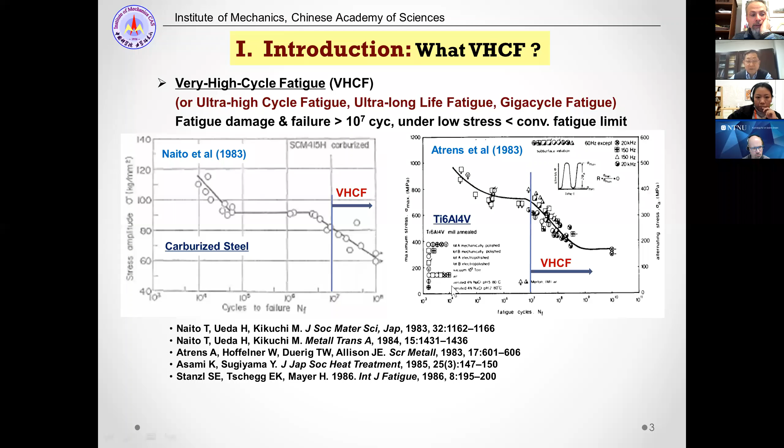We can see this part beyond 10 to 7 cycles of loading, and also here beyond 10 to 7 cycles of loading, the very high cycle fatigue regime.

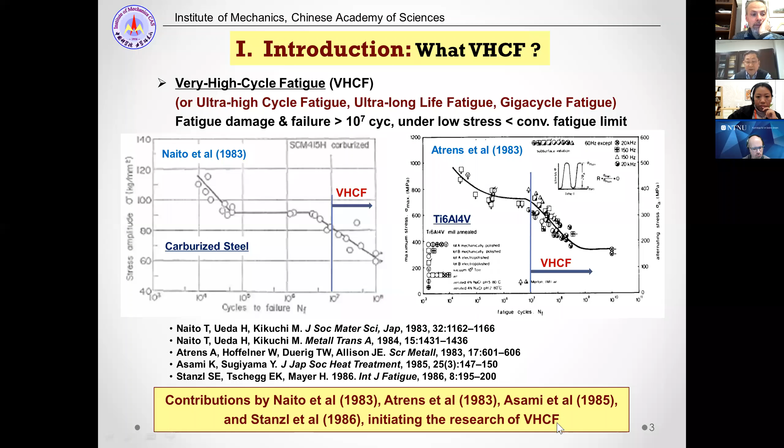I would like to say, due to the contributions by some early researchers, they initiated the research of very high cycle fatigue in the 1980s.

Here I would like to mention the reasons of very high cycle fatigue research. I would like to say very high cycle fatigue is a cutting edge regime in fatigue research, and also

a new regime, because very high cycle fatigue research is only 40 years old or less than 40 years old.

And the total fatigue research history is about 170 years. And very high cycle fatigue is

an important area of research because very high cycle fatigue behavior mechanisms are different from the cases of high cycle and low cycle fatigue.

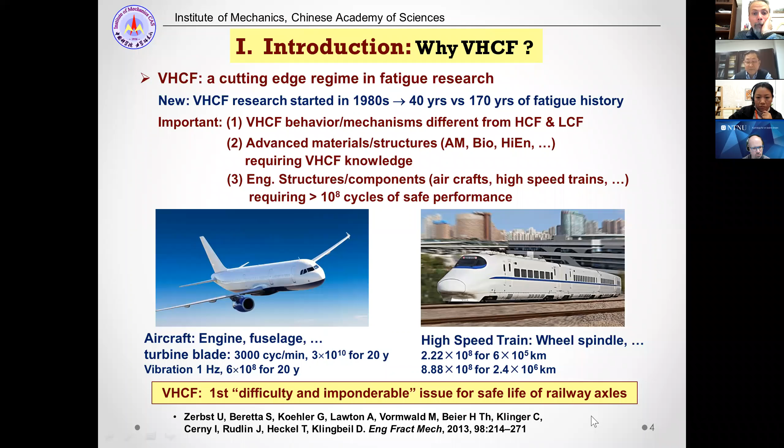So today I would like to share with you the challenges in very high cycle fatigue and the numerous cyclic pressing model we proposed.

So after such major content of the talk, I would like to share with you this type of topic. In these contents, I will use high strength steels and titanium alloys as examples.

Now the second part, basic characteristics of very high cycle fatigue, with four points in this part: first, internal crack initiation; second, SN curve; third, crack initiation life; and fourth, crack extension rate in initiation.

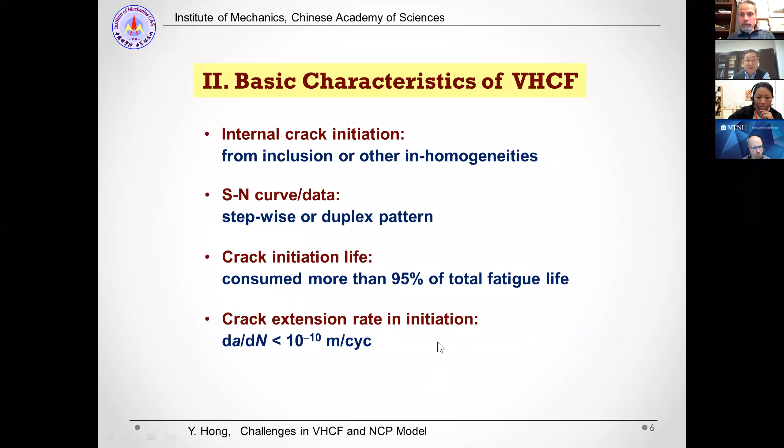The first point, internal crack initiation. We all know that fatigue crack initiation in low cycle and high cycle fatigue is due to persistent slip bands.

But in very high cycle fatigue, the crack initiation and growth mechanism is different.

The fisheye feature contains a rough area called FGA, fine granular area.

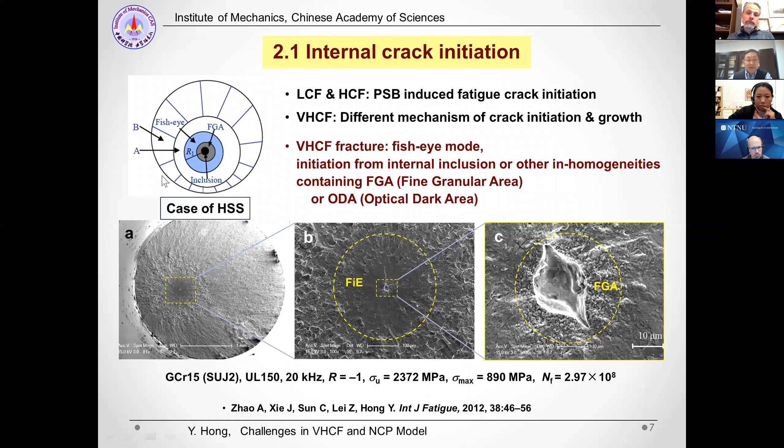We then tried to measure the size of FGA, this crack initiation region, and the value is between 40 and 100 microns, as the data shows here.

We also tried to calculate the data; this value for this region is related to the stress and the size of the defects.

And the value for delta K FGA is between 4 and 6 megapascal root meter, as the data shows here.

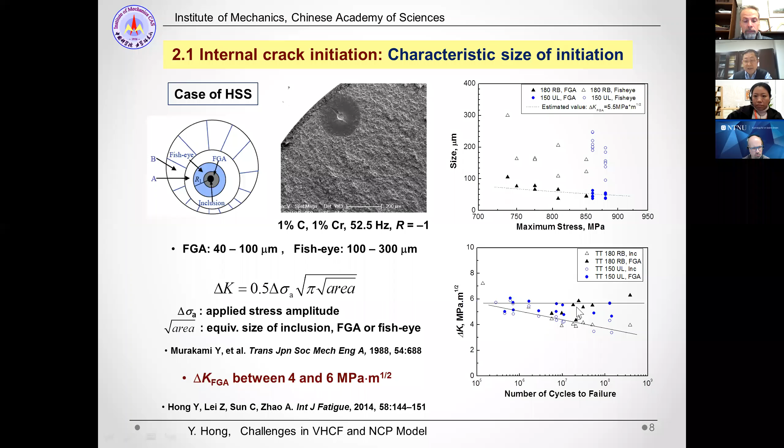So we proposed that the size of FGA, this initiation region during very high cycle fatigue, is an intrinsic characteristic size for internal crack initiation.

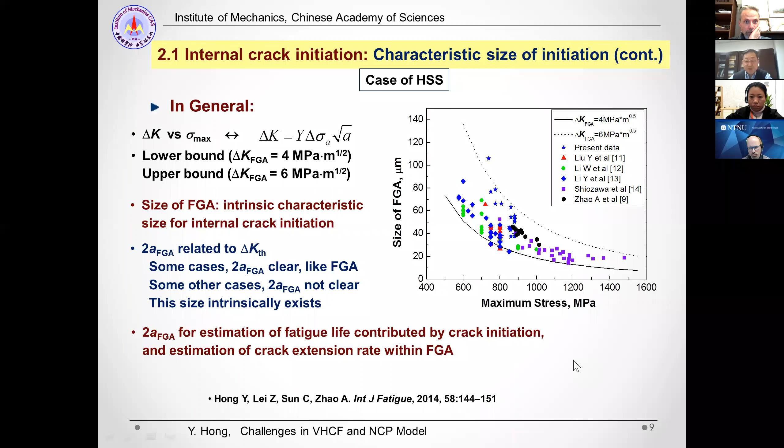Now I would like to talk about the case of titanium alloy. The crack initiation is also a fisheye feature, but for titanium alloy, the initiation spot is not an inclusion, but

some facets in the initiation area due to the cleavage process of the titanium alloy,

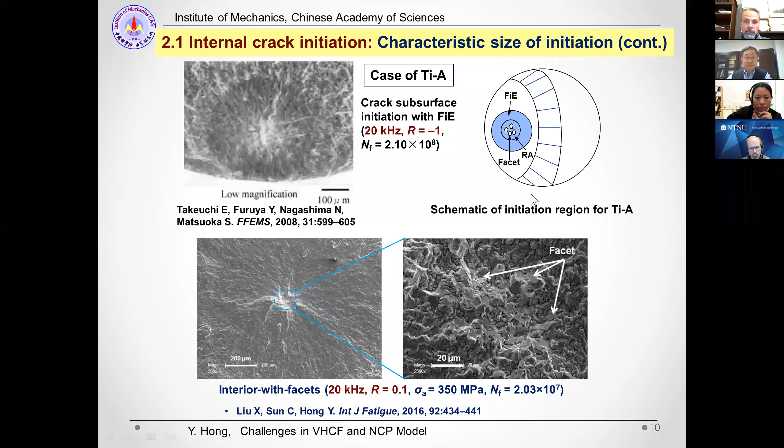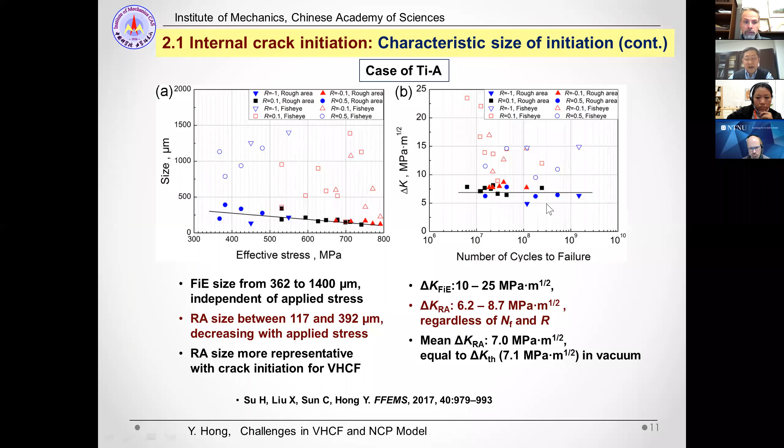We also measure the RA size, and it's between about 120 and 390 microns, which is also quite stable in comparison with the fisheye size. There is a large range for fisheye size, and also the delta K RA value is stable for titanium alloys.

So we try to analyze the threshold value for the crack initiation region. We use the formula for plastic size at the crack tip, and also a formula to correlate microstructure characteristic size in relation to material parameters of shear modulus and yield stress. We assumed when the plastic size of the crack equals the characteristic size of the material, the FGA formation is completed.

Thus we can obtain this result to show delta K FGA. This value is just in relation to shear modulus and Burgers vector of the material. It's very interesting and important, showing that delta K FGA or delta K TH is a function of Burgers vector and shear modulus of material. For steel, this value can be calculated as about 5.5 megapascal root meter, and this is in agreement with experiment.

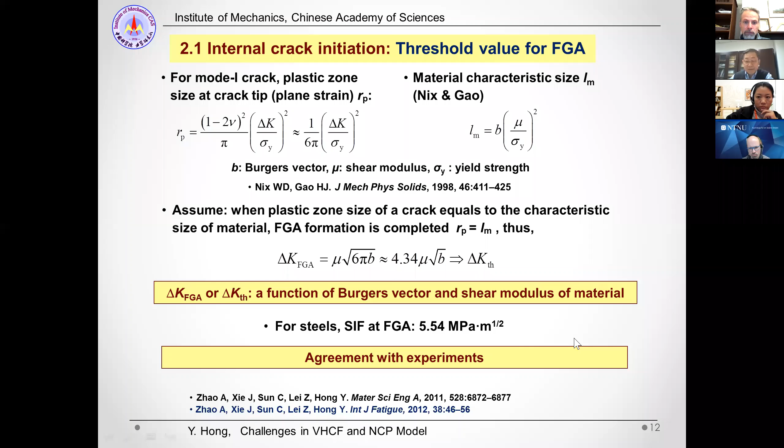That's the first point, and then I will mention the second point, the SN curve.

These are the data from a kind of round-robin test organized by Professor Sakai. The left part is crack initiation from surface cracks causing fatigue failure, and the right part is from internal crack initiation. We can see it's a kind of duplex SN curve, or stepwise SN curve, for high strength steel. For titanium alloy it's also a stepwise SN curve trend, also due to surface crack initiation and subsurface or internal crack initiation. So due to the different type of crack initiation from surface or from interior, they result in different trends of SN curve. That's the second point.

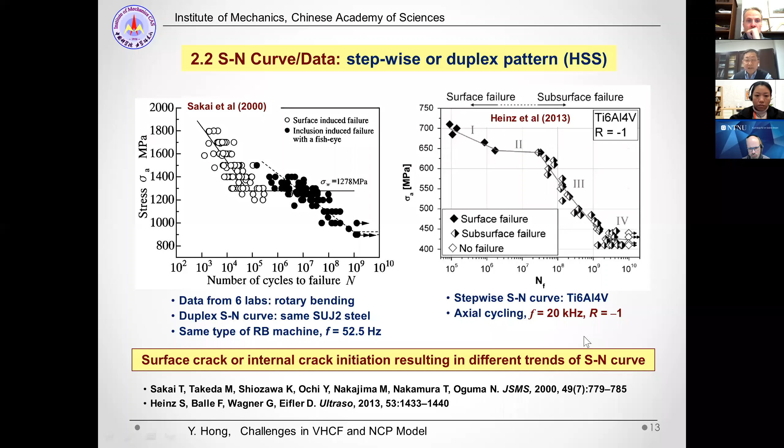The third point is about crack initiation life. We have mentioned previously the delta K value, which is a threshold for crack initiation.

We also assume the Paris relation can be used to describe the crack growth after the initiation, that is after delta K FGA. Then we can use the Paris relation to calculate the fatigue life from the boundary of FGA to the fisheye, and then from the fisheye to the critical size. From the boundary of FGA to the boundary of fisheye, that's N sub 1, and from the boundary of fisheye to the final fracture point, that's N sub 2.

For example, N sub 1 can be written like this, and we also use such parameters for calculation. After this, we can obtain the initiation life by the total fatigue life minus N sub 1 and N sub 2.

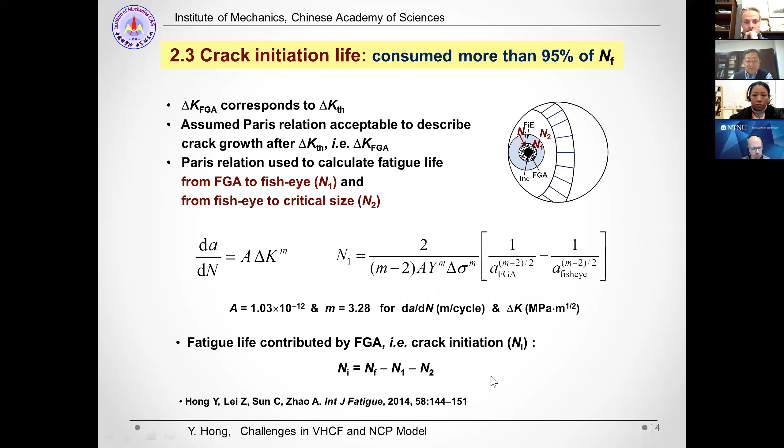Therefore we are able to obtain the result for high strength steel. This result shows that at very high cycle fatigue regime, the initiation life is larger than 95% of total fatigue life. And if the fatigue life is 50 million cycles, the initiation life is larger than 99% of total fatigue life.

For titanium alloy, the initiation life for very high cycle fatigue is between 96 and 99%. So we can say that for fatigue damage, including very high cycle fatigue, the fatigue life is almost consumed by the crack initiation process, that is the formation of the initiation zone of FGA, or RA.

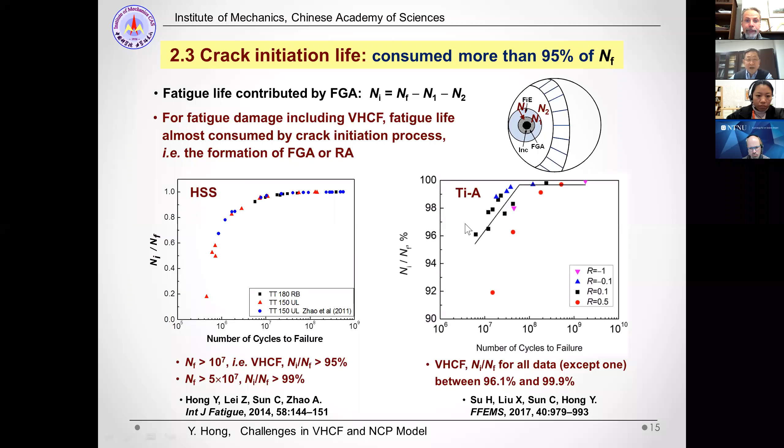The fourth point is about crack extension rate in initiation. We have been talking about the initiation life, and also we know the size of this initiation zone, so we can obtain an average value for crack initiation extension rate. I like to use the term extension instead of growth, for the extension rate within FGA or RA, for high strength steel and for titanium alloy.

The value for high strength steel is 10 to minus 12 and 10 to minus 13 meter per cycle, and for titanium alloy is 10 to minus 11 and 10 to minus 13 meter per cycle. It's very slow. I would like to mention some indirect measurements of these extension rates.

I think this is the first case, by Stanzl-Tschegg and her co-author, showing that the extension rate in FGA is 10 to minus 12 meter per cycle. They used this type of specimen to perform the measurement, and compared the fracture surface morphology with the tubular specimen and the round specimen to get this value.

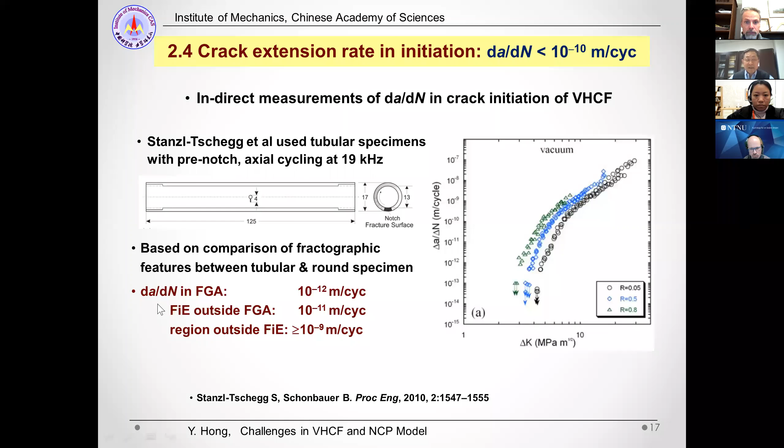Another indirect measurement uses a kind of repeated two-step testing, and they are able to catch the pitch mark on the fracture surface, but their measurement is the area of the fisheye region beyond FGA, the initiation area.

Another example of indirect measurement uses variable amplitude testing for structural steel, and this result for a high carbon bearing steel gives 10 to minus 11 and 10 to minus 12 meter per cycle for the fisheye.

Such efforts are devoted to the crack extension rate in the fisheye region outside FGA. So we are expecting direct measurements of crack extension in the real initiation region of FGA, or RA.

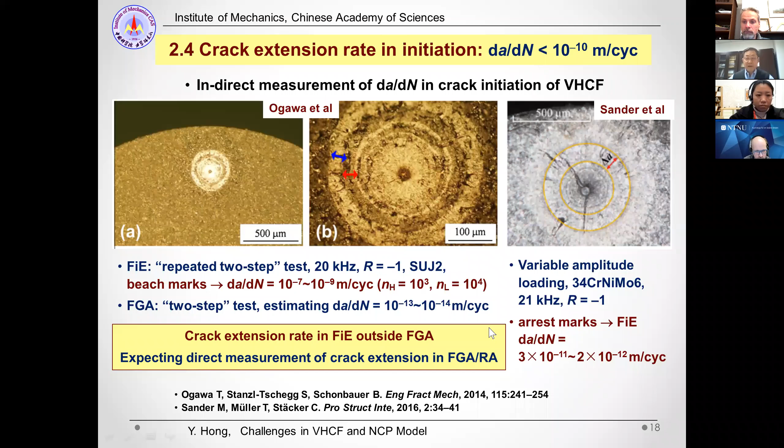This is the first case of crack extension rates obtained in high strength steel, and we use a kind of repeated two-step cycling to catch the crack growth traces in the FGA stage or FGA region, and then we are able to obtain the crack extension rate in this region directly.

The result shows the rate is between 10 to minus 11 and 10 to minus 13 meter per cycle. We are happy to see that the result here can be well connected with the growth data in the FGA, in the fisheye region outside FGA, meaning that the initiation extension rates and the early growth stage crack rates, from the beginning to the early growth, are well connected.

This we are happy to see is the data trend.

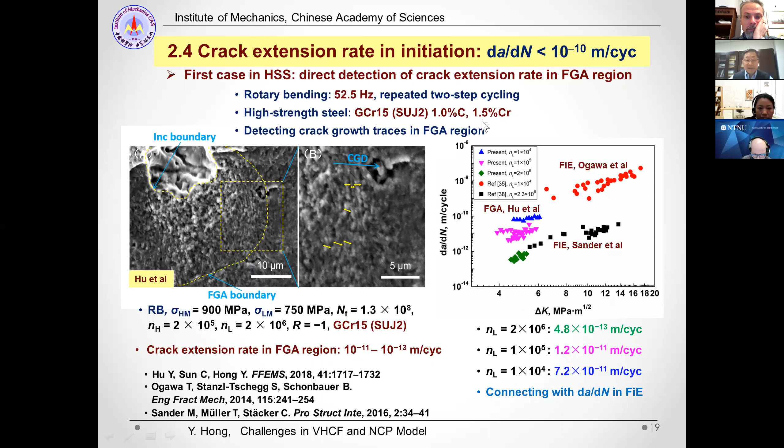This is a step cycling for a stainless steel, and the results show that the data is between 10 to minus 12 and 10 to minus 11 meter per cycle.

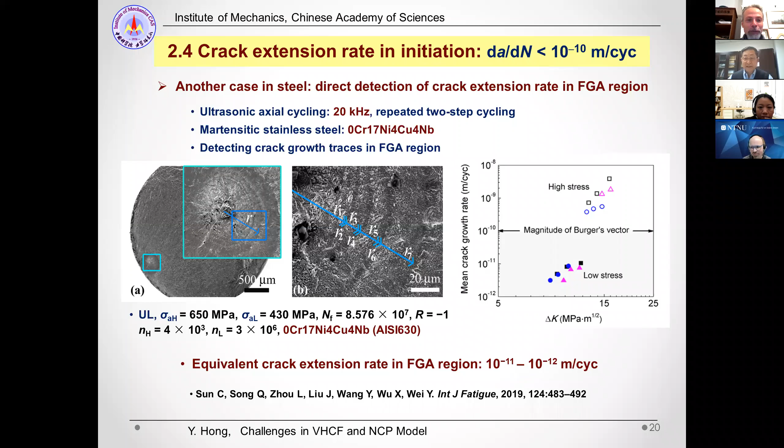I think the internet is okay now, right, Luca? Can you hear me? To be honest, sometimes it doesn't work, but I think we can follow, so please keep going. In case I would stop. The connection is a little slow, but I think we can follow what you are saying. Maybe since we are focused on your slides, you could turn off your camera, it might help. You have a button at the bottom of the screen on the left hand side. If you stop your video and keep talking, we can follow your presentation by watching the slides. It seems that now it's working, so please keep going. In case I would stop you. Thank you for double checking.

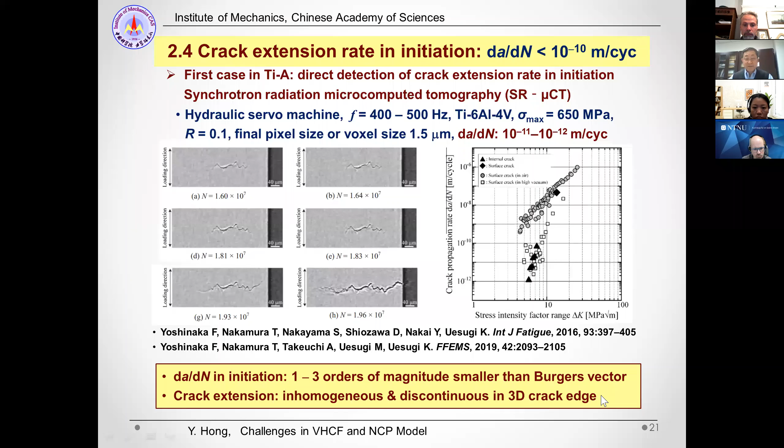Now the summary of this part: I would like to show this picture of crack initiation and early growth for high strength steel and titanium alloy. The initiation region of FGA is a characteristic region for crack initiation, and the value of delta K, the delta KFGA or delta KRA, is almost constant and is a function of Burgers vector and shear modulus. More than 95% of total fatigue life is consumed in the initiation region.

Also, the crack extension rate is very low, between 10 to minus 11 and 10 to minus 13 meter per cycle. So in this stage, we say very high cycle fatigue is a cutting edge research regime, and it contains unique characteristics and mechanisms. So we would ask, what are the challenges in very high cycle fatigue?

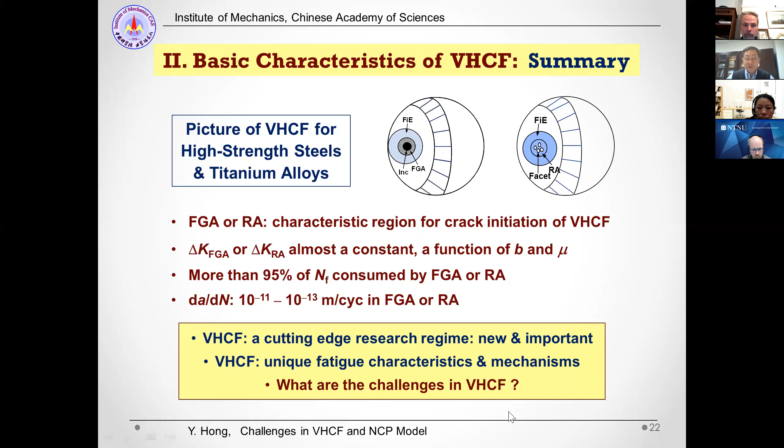The next part is major challenges in very high cycle fatigue. I would like to mention 3 points: the first is loading frequency effect, the second is cracking evolution detection in the initiation phase, and the third is parameters and models to characterize crack initiation and predict fatigue life.

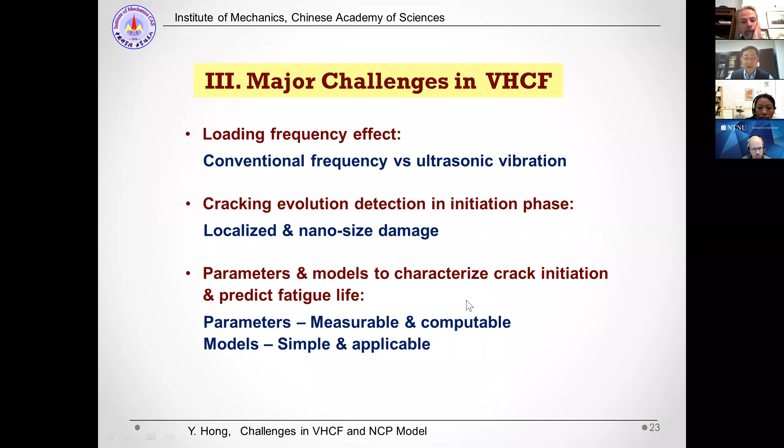About loading frequency effect, I will show you this example. For the high strength steel material, the frequency effect is limited.

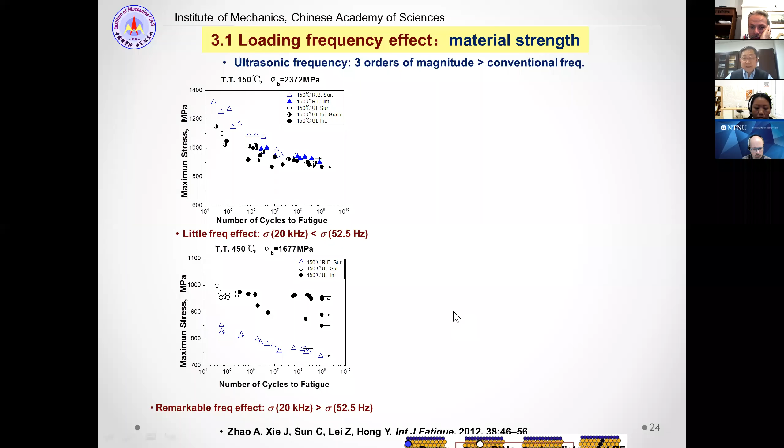But for the low strength state of the material, the frequency effect is very large, and as a result, the fatigue strength by ultrasonic frequency—that's very high frequency—is larger than the conventional frequency. This is explained because for high strength states, the microstructure is refined and contains large amounts of barriers that restrict dislocation movement. But for low strength state material, the barriers are fewer, so there's limited restriction for dislocation movement.

So the dislocation moving distance will be inversely proportional to the loading frequency. For low strength state material, the damage per cycle will be larger than the damage per cycle of ultrasonic loading. So we say that for low strength material, the frequency effect is remarkable, but for high strength material, the frequency effect will be diminishing.

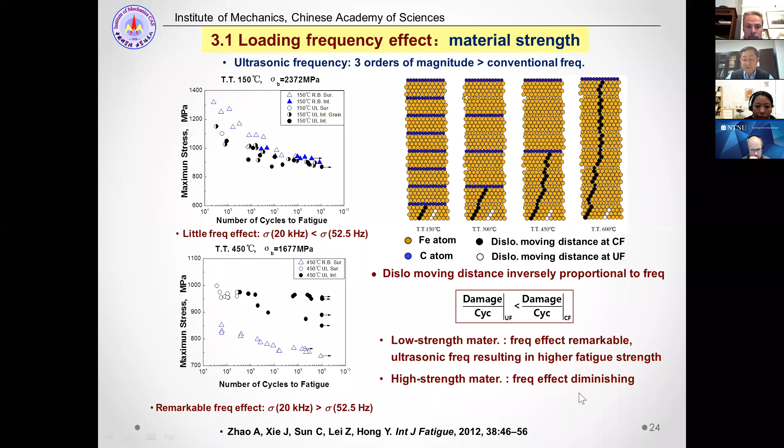I also would like to mention the temperature rise under different loading frequencies—that's a loading frequency effect. We have this type of result to show: for the specimen without cooling under ultrasonic frequency loading, the temperature rise is about 70 to 130 degrees.

But if the specimen is subjected to air cooling, the temperature rise is somehow smaller. For the case of very high cycle fatigue testing, the temperature rise is less than 25 degrees. For loading frequency of 120 hertz, which is not conventional frequency, the temperature rise is very limited, less than 3 degrees. So we can say high frequency, especially ultrasonic frequency, will cause specimen temperature rise, and if this happens, it will reduce the material strength and also change the frequency response, reducing fatigue strength.

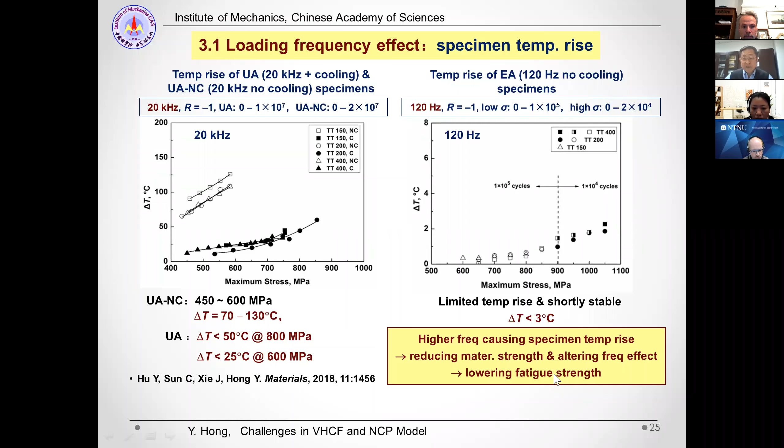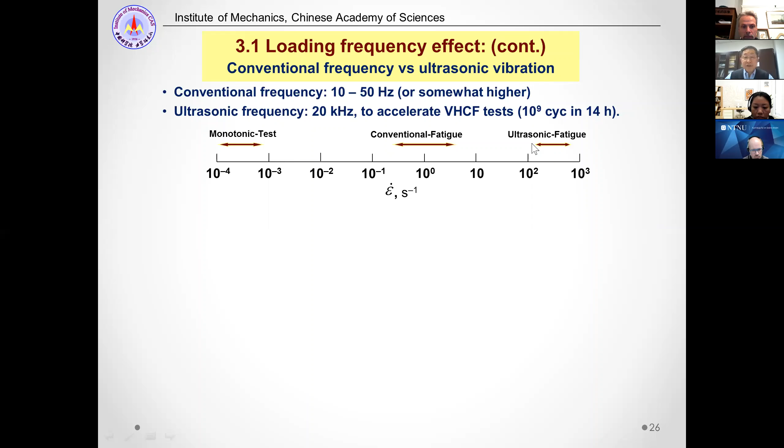So for the frequency effect, there's about three orders of strain rate difference between conventional fatigue and ultrasonic fatigue. As I mentioned, for low strength state the frequency effect is remarkable, but for high strength state the frequency effect is limited. Also, high frequency causes specimen temperature rise. Also, for BCC and HCP materials the frequency effect will be sensitive, while for FCC material the frequency effect will be less sensitive. But this topic I think is also a challenge for very high cycle fatigue research.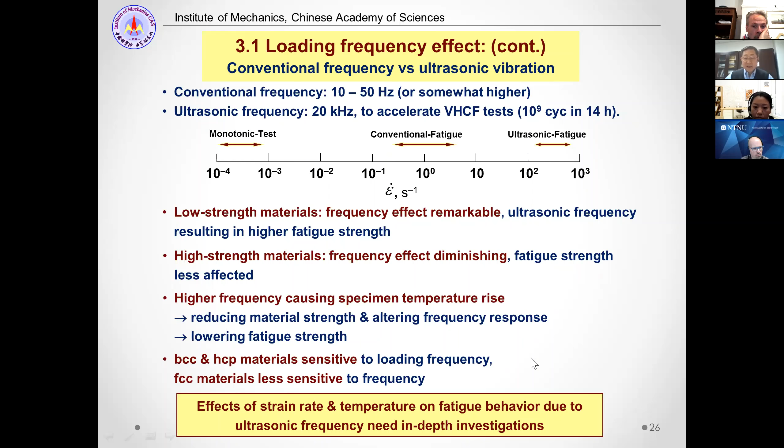It needs in-depth investigation. The second challenge is crack evolution detection in the initiation phase, and this is a promising method—synchrotron radiation microcomputed tomography. This is from Nakamura's group. They use this new method to observe the defect of crack initiation and early growth, and also measure the crack growth or extension rates between 10 to the -11 and 10 to the -13 meters per cycle.

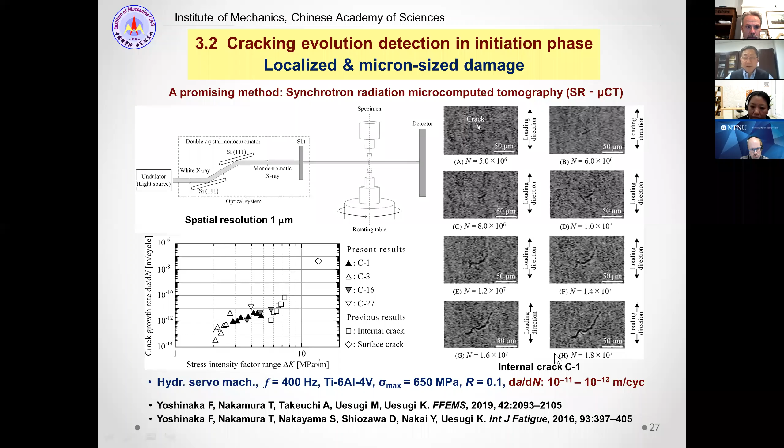Another example is by Professor Palin-Luc's group, using a kind of in-situ synchrotron ultrasonic testing. The difference between this one and the previous one is they use ultrasonic testing to accelerate the fatigue process, but the previous one used a frequency of 400 hertz. So it's a different kind of testing. They use a similar method to detect the small damage evolution process, but I think it's also still in the beginning stage.

In this case, they're very clever to use a kind of artificial defect inside the specimen to detect or observe the defect evolution or defect development during the loading process. And if we can explicitly reveal the crack initiation and early growth, this will lead to a significant breakthrough of very high cycle fatigue research.

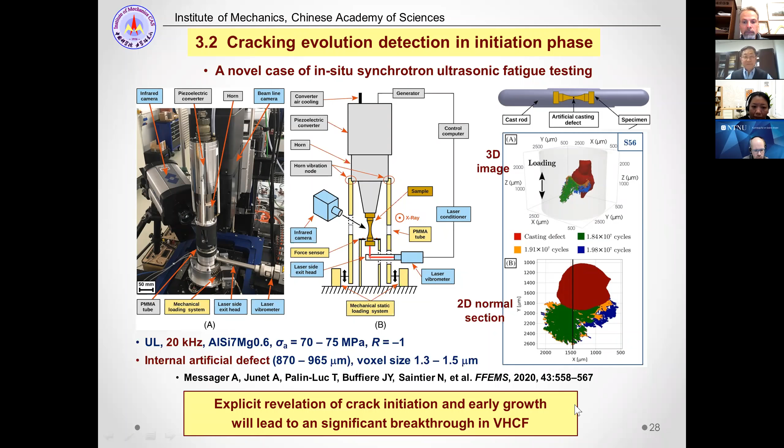The third challenge is parameters and models to characterize crack initiation and predict fatigue life. Here I would like to mention the model by Murakami—this is very often used, and also the concept and parameter of root area is often used in very high cycle fatigue assessment. This model correlates fatigue strength in relation to the material hardness parameter and also the defect size.

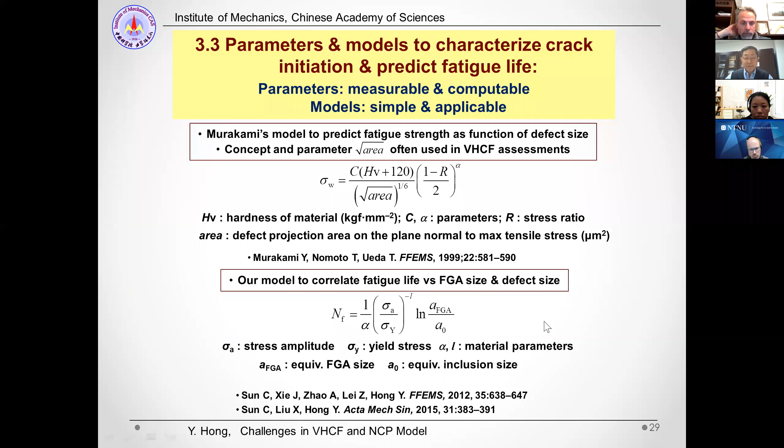In recent years, we also proposed a model to correlate fatigue life to the loading stress and yield stress and FGA size and inclusion size. Also, I would like to mention the concept of fatigue indicator parameters. This is to be used in very high cycle fatigue, and previously quite often used in low cycle and high cycle fatigue regimes. This topic was covered in the first Global Live webinar by Professor McDowell—I think we can refer this aspect to his talk, his presentation, which is available on the website.

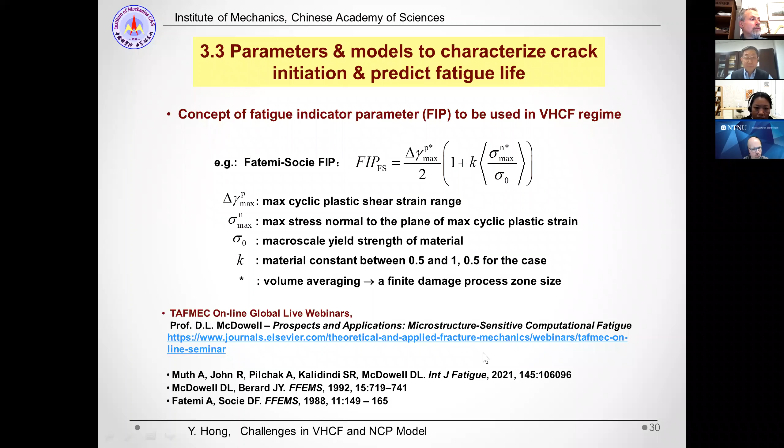So I would like to say the third challenge of parameters and models is a very important aspect, because the parameters should be measurable and computable, and models should be simple and applicable, and also should reflect the physical process and mechanism of very high cycle fatigue. So quantitatively describing the damage behavior and correctly predicting the fatigue property of very high cycle fatigue is a very important challenge in this area.

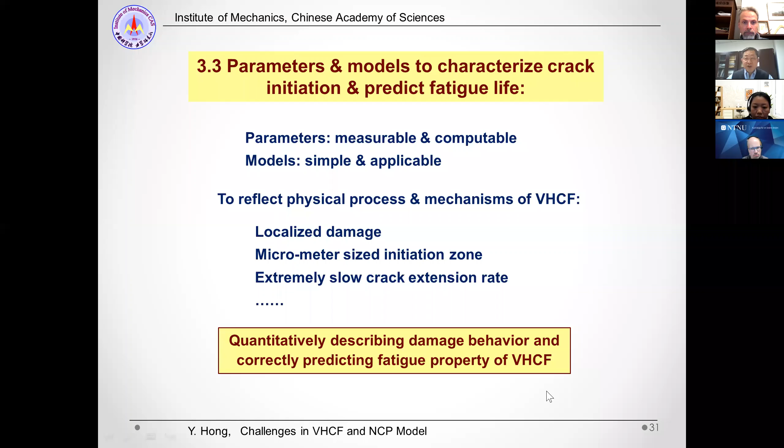So here I mentioned the three challenges in very high cycle fatigue. At this stage, I think we may ask two questions. The first is, what is the nature of the initiation region? And the second is, what is the mechanism of FGA and fine granular area formation? So this is the fourth part of the talk, numerous cyclic pressing model.

First, I would like to mention some previous models. The first one is hydrogen-assisted FGA formation, meaning that the existence of hydrogen will cause the rough fracture surface at crack initiation. The second one is called dispersive decohesion of spherical carbides, meaning that the existence of carbides will be the crack initiation point, due to decohesion between the carbides and the matrix, forming a rough surface at crack initiation.

The third one is called fine grain formation ahead of the crack tip, meaning that at the crack tip, plastic deformation induces microstructure refinement, and then crack initiation and growth form a rough fracture surface. The fourth one is called local grain refinement at the crack tip to form FGA. This one is somehow similar to the third.

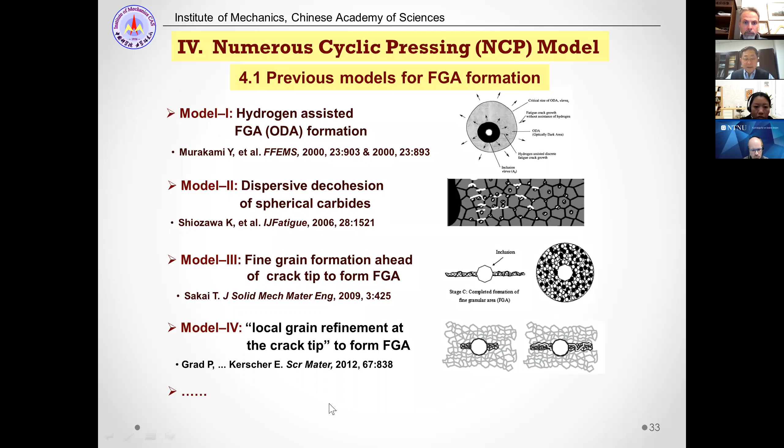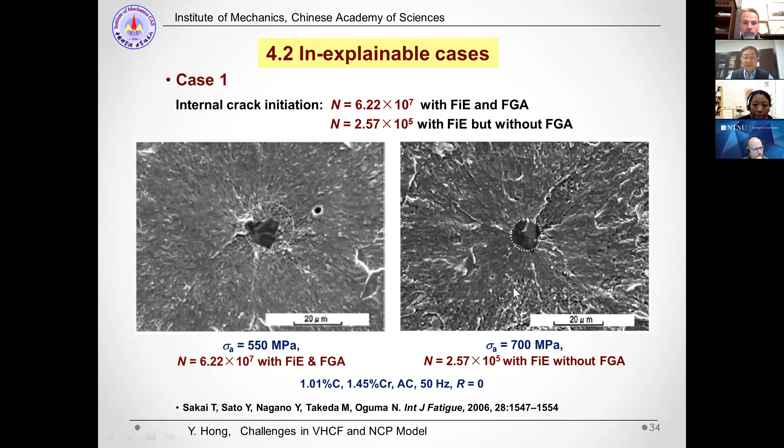But these previous models cannot explain different experimental cases. For example, for the case of 10 to 7 cycles loading, the FGA and rough fracture surface are quite evident, but for loading of 10 to 5, with somehow smaller loading cycles, the FGA morphology is not such a rough surface. So for different loading cycles, the morphology can be different. And for different loading stress ratios, there may also be different morphology. For a stress ratio of -1, the rough surface of FGA is evident, but for a stress ratio of 0.5, the FGA cannot be observed - it's not FGA morphology.

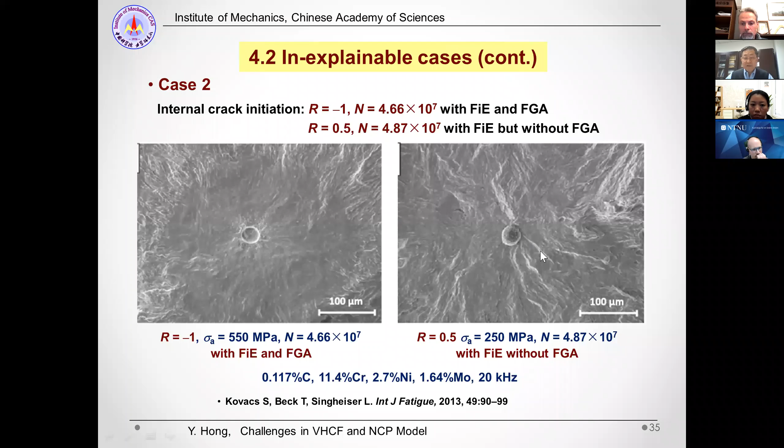So at this stage, we try to find what is the nature of the initiation region of FGA. We use a specimen of high-strength steel to observe the fracture surface of rough morphology, and we use the special polishing method to observe the rough surface at about 650 nanometers thick.

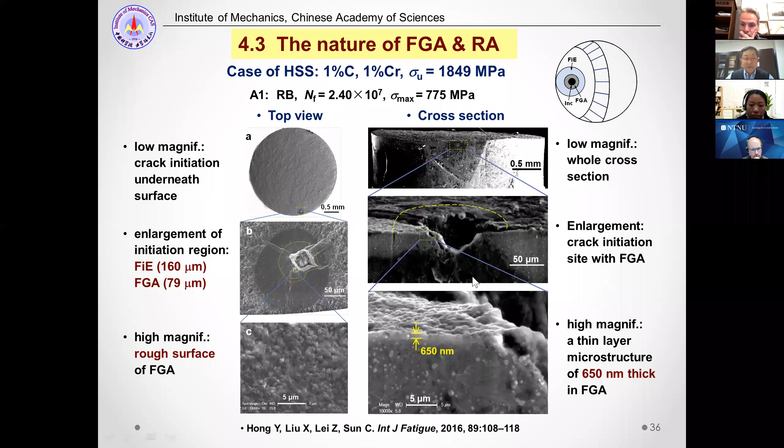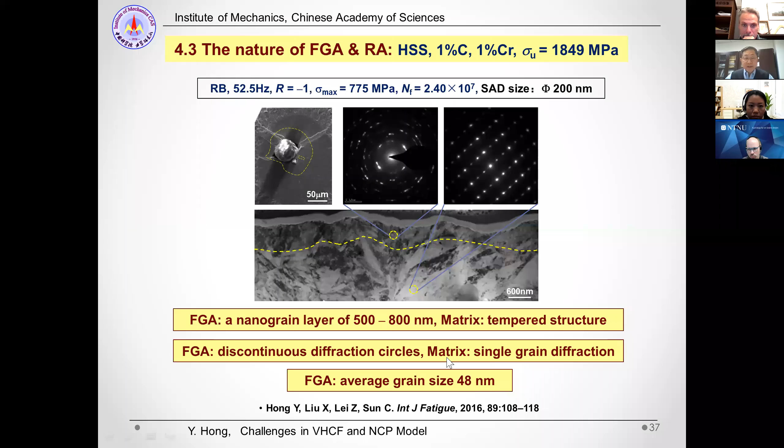Then we cut a FIB sample to observe the fracture surface, revealing that the fracture surface is a nanograin layer between 500 and 800 nanometers, while the matrix maintained its original tempered microstructure, with average grain size about 50 nanometers. We also used a specimen to observe both fracture surfaces, revealing that both surfaces contain a nanograin layer on the fracture surface. So we say that the nature of FGA in high-strength steel is a nanograin layer, with thickness between 500 and 800 nanometers, and grain size about 50 nanometers.

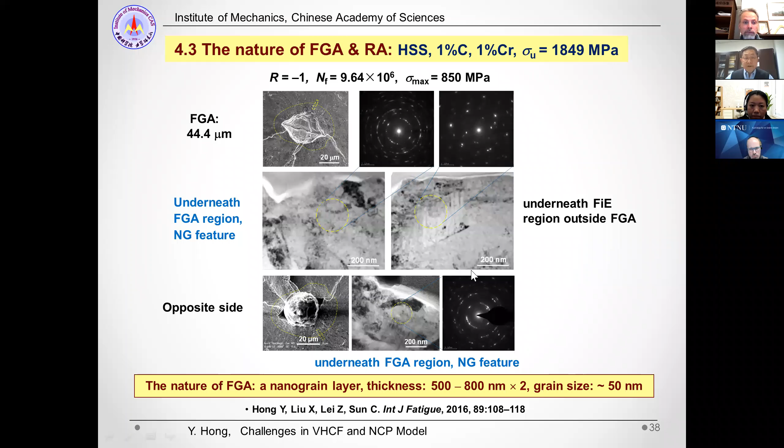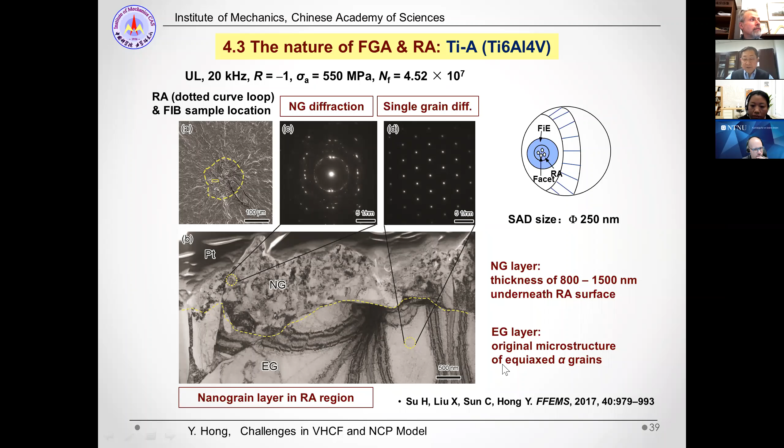And for the case of titanium alloy, we also observed the fracture surface of the initiation region by a FIB sample, revealing that the thickness is between 800 and 1500 nanometers. The microstructure is refined, and this is an equiaxed microstructure. Also for the microstructure of the lamellar feature, the fracture surface is also refined. So for titanium alloys, the initiation region is a nanograin layer, regardless of whether the microstructure is equiaxed or lamellar.

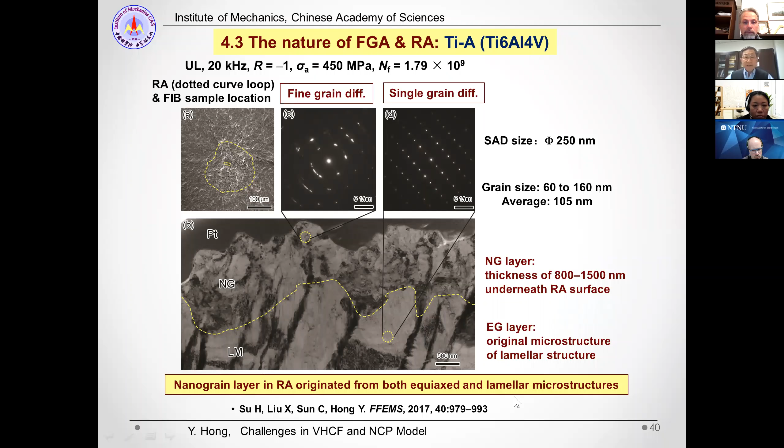Then we propose a model called the numerous cyclic pressing model. Crack initiation occurs first at an inclusion, and then nanograin formation occurs at the crack wake by repeated pressing between the crack surfaces. This process is related to crack closure and residual stress relaxation. This process continues to produce the nanograin layer, and also, with growth of the crack, the new crack can repeatedly compress to further refine the microstructure.

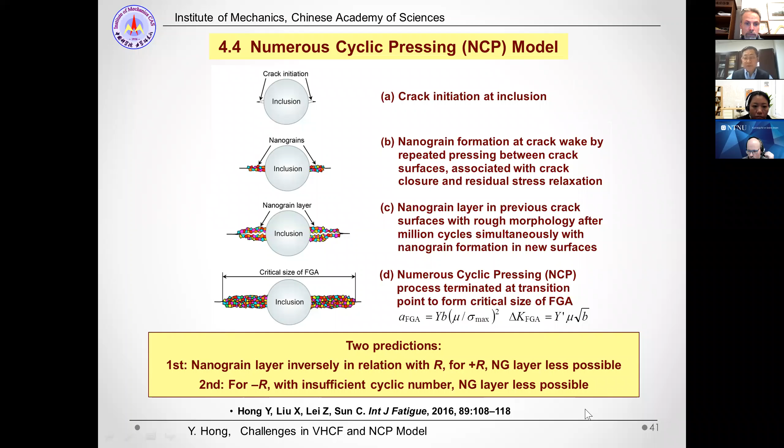So we performed some further tests, this one at -1 stress ratio. We can see the diffraction pattern shows slightly elongated spots, meaning there are a couple of grains in the diffraction circle. For stress ratios of 0.1 and 0.3, all the diffractions are isolated spots. So this is the verification of the first prediction.

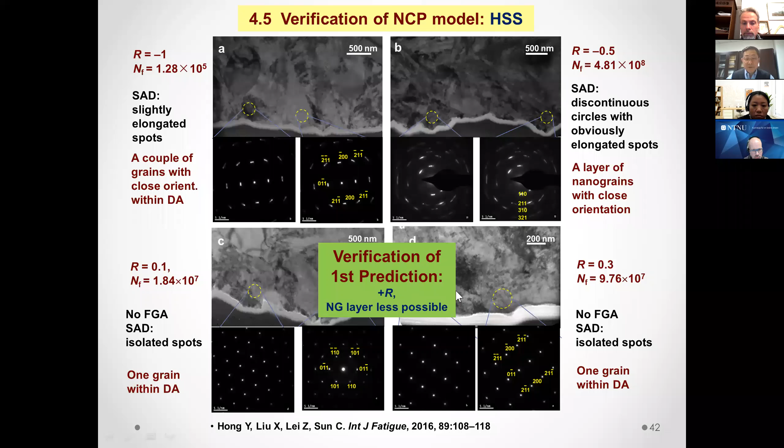This is the second verification, the verification of the first prediction. We also used titanium alloys, loaded under 0.5 stress ratio, and saw no microstructure refinement happens in this case. So this is also a verification of the first prediction.

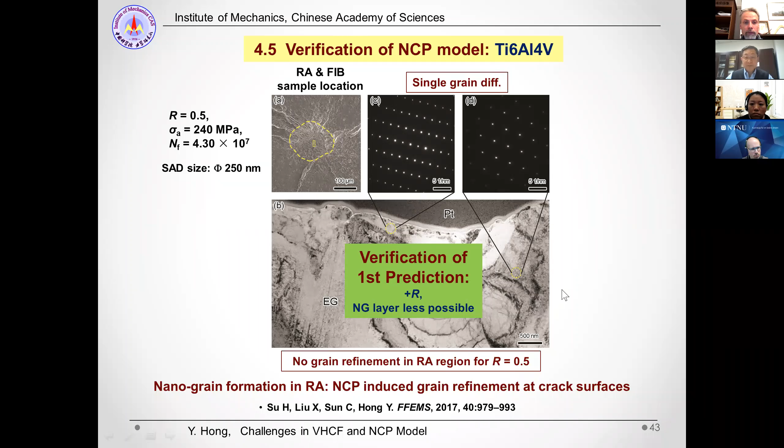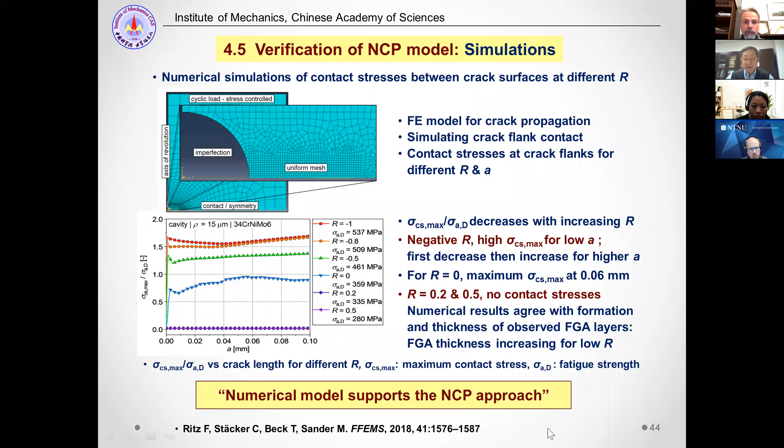There's also a numerical simulation by German researchers. Their result shows that under negative stress ratio, there's a large contact stress, but for positive stress ratio, the contact stress is almost zero. So the numerical simulation supports the NCP approach. Okay, now the fifth part: further results regarding the NCP model.

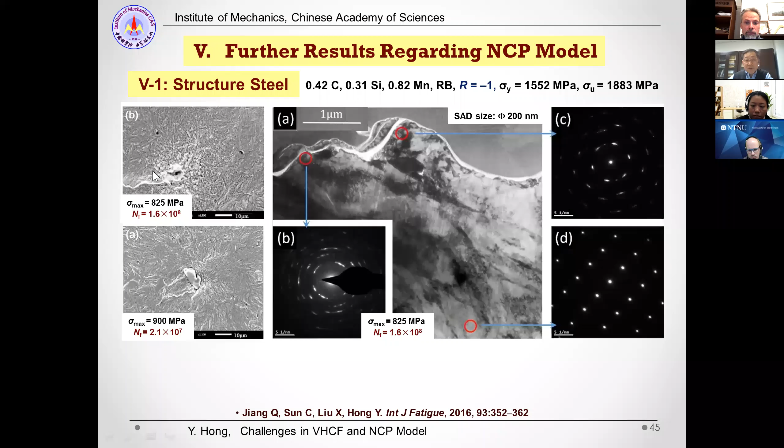The first case is structure steel, since previous cases were all steels with high carbon content, while this one has middle carbon content. In 10 to 8 cycles of loading, the rough surface of the initiation region is quite well developed, but for 10 to 7 cycles it's less developed. We also observe this region has quite refined microstructure of nanograins. So FGA and nanograin layer is more pronounced in 10 to 8 cycles of loading, but less pronounced and discontinuous or discrete in 10 to 7 cycles.

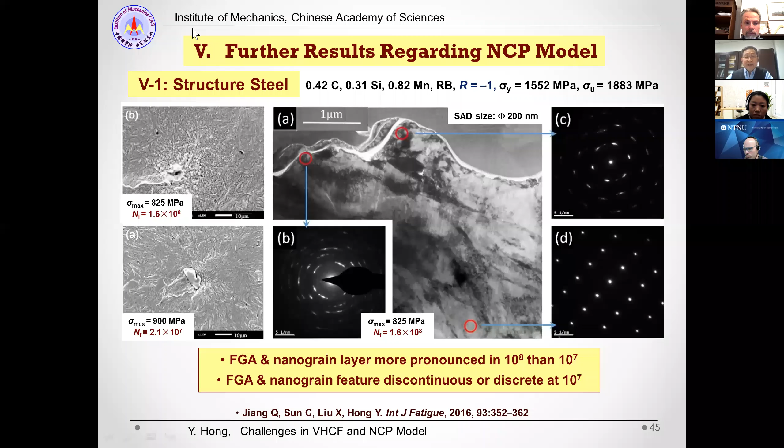The second case is high strength steels at variable cycling, whereas the previous one was not variable. We also saw here with variable cycling a rough area and a nanograin layer - so it's a nanograin surface layer of the FGA region under variable loading, whereas the previous one was constant amplitude loading.

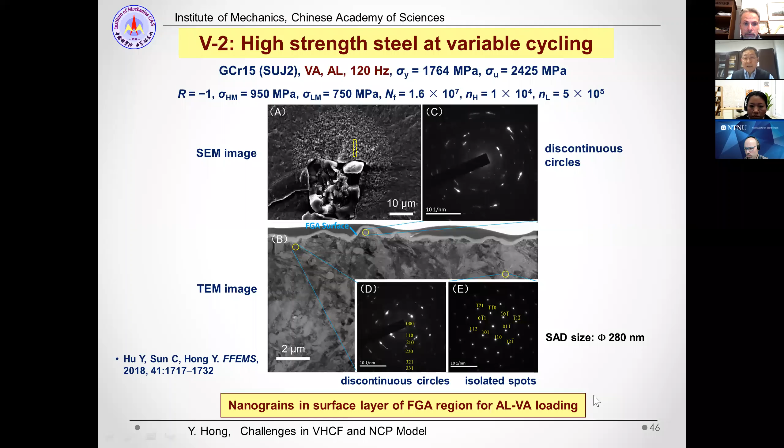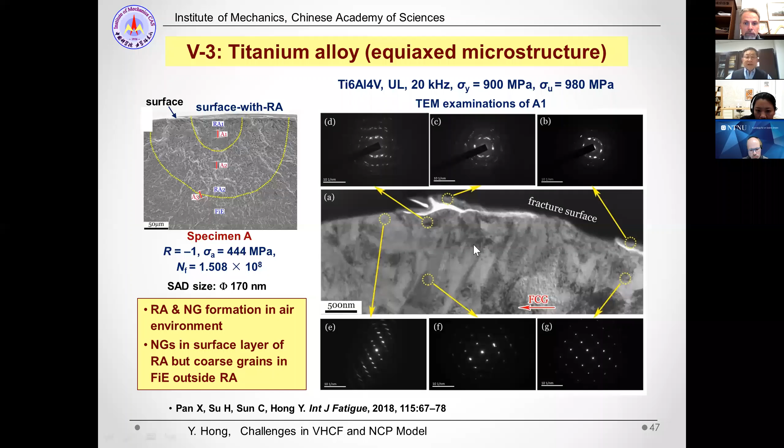The fourth result is grain size distribution in the initiation region of high strength steels and titanium alloys. We tried to measure a number of FIB samples - this is the case of high strength steel, and we also observed titanium alloys to reveal the grain size distribution. For high strength steel and titanium alloy with duplex microstructure versus equiaxed microstructure: high strength steel is between 50 and 70 nanometers, titanium alloy is about 100 nanometers for duplex microstructure, and 50-60 nanometers for equiaxed microstructure.

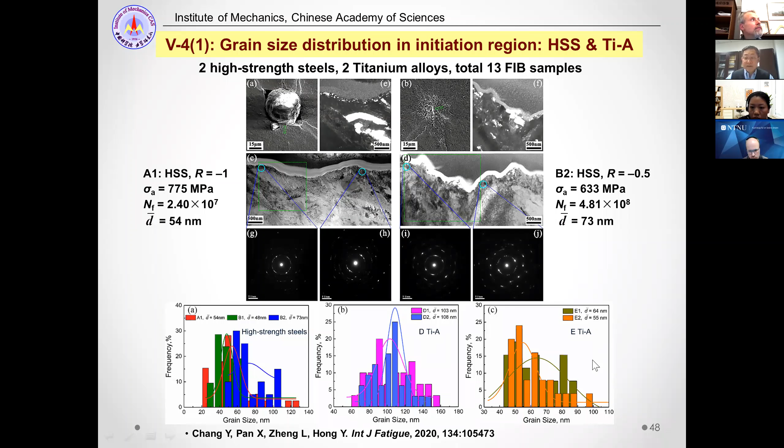We are also able to measure the thickness of the nanograin layer for high strength steels and titanium alloys. We propose a normalized quantity, D star, defined as L over L0, where L0 is the perimeter of the continuous diffraction ring, and L is the total length of this continuous ring. By this quantity, we can describe the evolution of refined grains for high-strength steel and titanium alloys.

For high-strength steels, the grain size is 50 nanometers for -1 stress ratio and about 73 nanometers for -0.5 stress ratio, with thickness between 300 and 600 nanometers. For titanium alloys with equiaxed microstructure, the grain size is about 60 nanometers, with thickness about 200 to 500 nanometers. For duplex microstructure, the grain size is 110 nanometers, with thickness 700 to 1500 nanometers. Also, the nanograin size increases with crack growth path away from the fracture surface, and is associated with gradually reduced contacting actions between crack surfaces. We can see this phenomenon.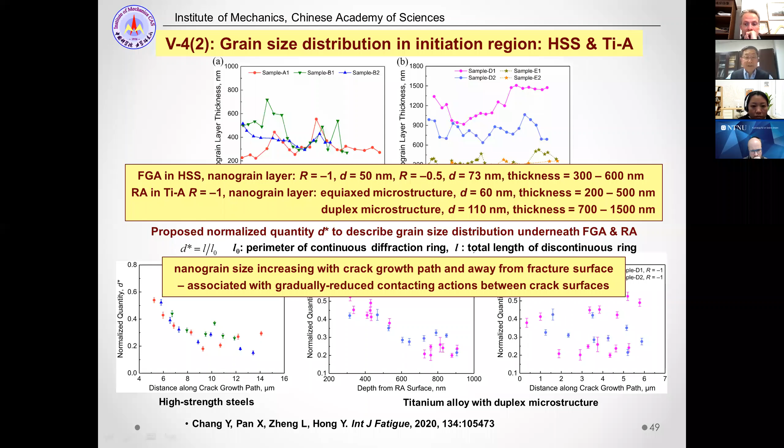The fifth case of results is the dual microstructure of titanium alloy. The dual microstructure is lamellar mixed, or lamellar and equiaxed. We can see the internal crack initiation, and the FGA or RA region has refined or nano-sized microstructure. So for titanium alloy with lamellar and equiaxed microstructure, the crack initiation region is nanogranular, but remains original microstructure at positive stress ratio.

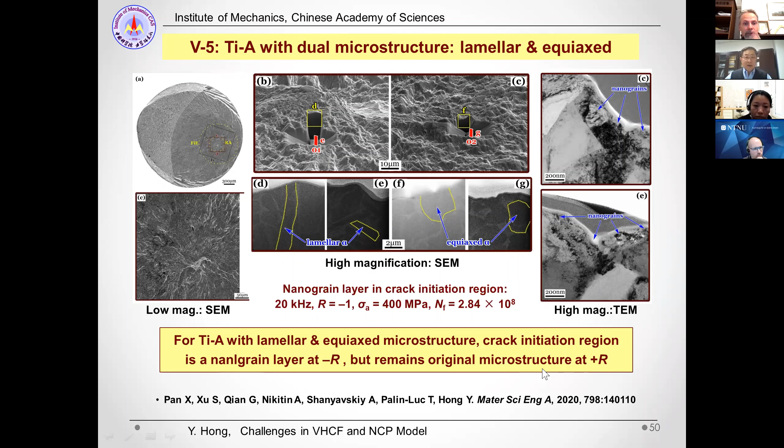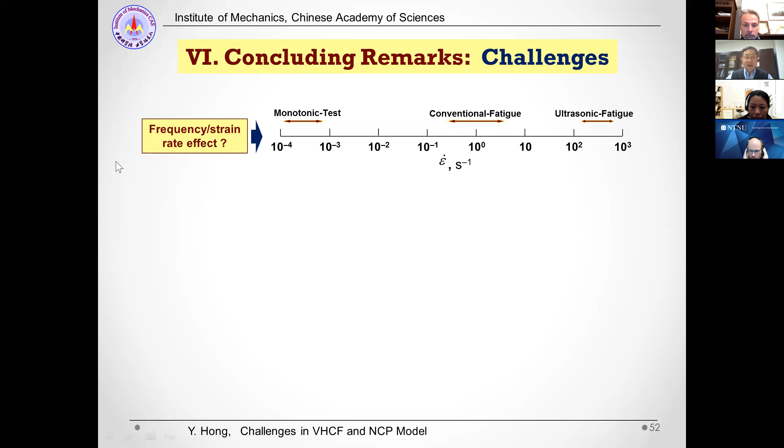The second concluding remark is the challenges. I mentioned three challenges: the first is frequency or strain rate effect; the second is the evolution of the initiation region of FGA and RA; the third challenge is the parameters and models to be developed.

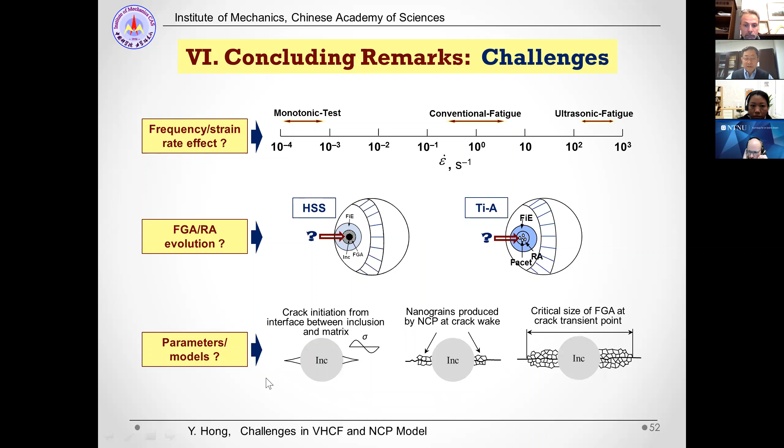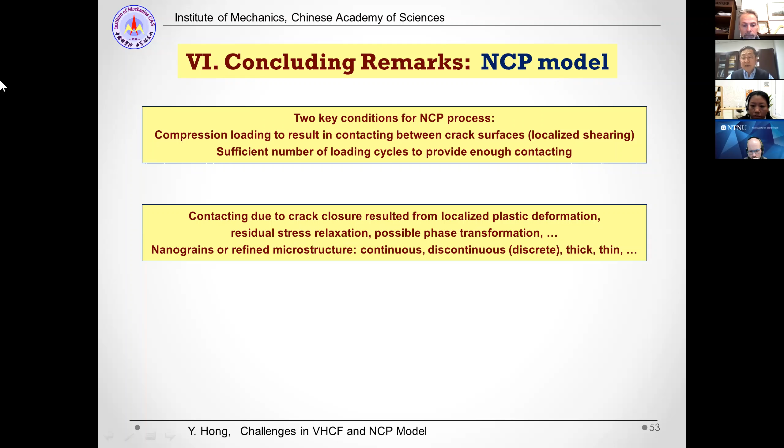The third concluding remark is the NCP model. I would like to say there are two conditions for the NCP model or NCP process. The first is compression loading should be maintained. The second is a sufficient number of loading cycles. This process is related to crack closure, resulting from localized plastic deformation, residual stress relaxation, and possibly phase transformation. The formation of nanograins and refined microstructure can be continuous or discontinuous/discrete, and the thickness can be large or small, depending on the materials and loading conditions.

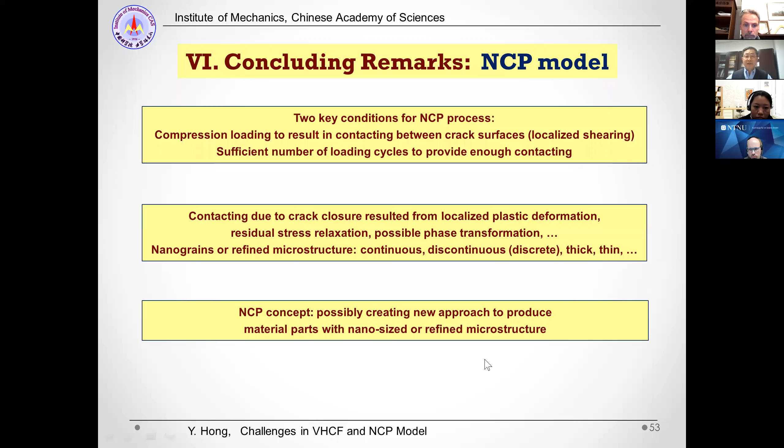Also, I'd like to say the NCP concept possibly creates a new approach to produce material parts with nanosize or refined microstructure. So this is almost the end of my talk.

We are all climbing the mountain of fatigue and fracture. We have some problems, we try to get solutions, and we may get some success, but I don't think we can finish - we always have new starts. So thank you very much.